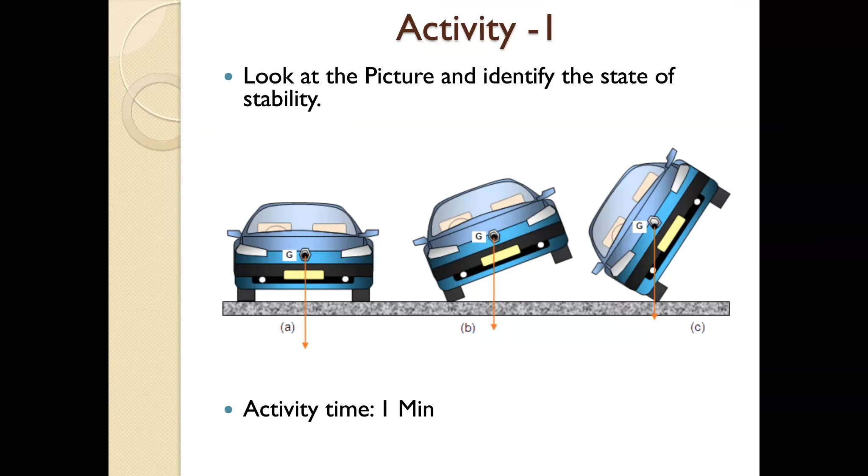Thank you, Yogeshwar. A is fully stable, B is partially stable, C is unstable. Okay Yogeshwar, can you unmute yourself and tell me how you have judged the system as stable, unstable, or partially stable? In the case of A, the center of gravity is at the middle and both sides are balanced, hence it is stable. As in case of B, partially, one half is stable, the other is making it imbalanced, so even a slight disturbance may push it to unstable. Very well said sir. The last one is completely unstable because the entire weight is managed with a small surface area, so it is completely unstable. Well said sir, very good sir. Thank you for your response.

So as you rightly mentioned, it mainly depends here. I think this is very basic, at the physics level, the school level, this will be used, right? So based on the gravity and based on the weight, how it is balanced, the system, we can justify whether the system is stable or unstable if there is an external force acting on it. So that's the key point over here.

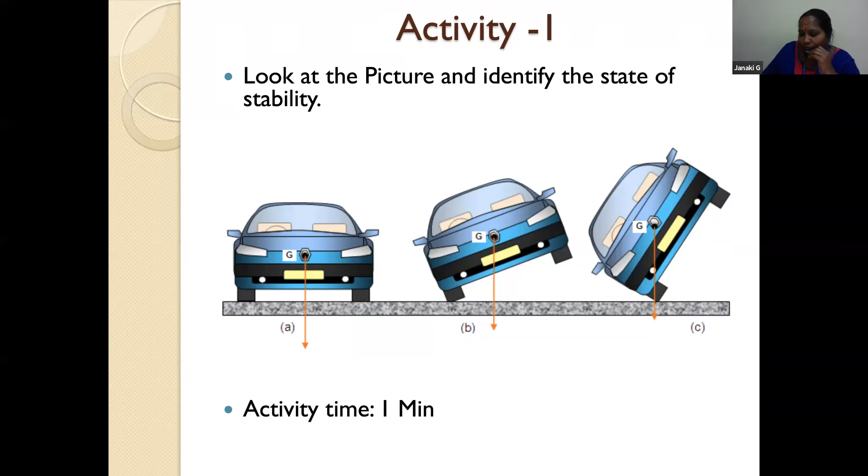Here we are going to discuss about drive systems, meaning you'll be having motor and loads, and it involves some inertia, the mass, and with speed variations or any small disturbances, how the system stability gets collapsed and what we need to do to make them stable. So that we need to analyze, right? Thank you, Yogeshwar, for your input.

Let's start with the definition of stability. A system is stable when the output is completely controlled - for the given input, you get the expected output. Then only we can call that system a stable system. The literal definition is: the ability of any system which provides bounded output when a bounded input is applied. That's what we call BIBO stability.

When we talk about the stability of a system, there are different categories. We can classify the system as steady state, transient state, or dynamic state. Generally, in an ideal case, we call that steady state stability. If there is an abrupt change or a large disturbance occurring, we do transient analysis. Dynamic analysis is whenever we run the system, we'll get some small disturbances, so even for small disturbances, the functionality of the system should not be affected. For that reason, we need to analyze dynamic analysis, and accordingly control our inputs so that the system will be stable.

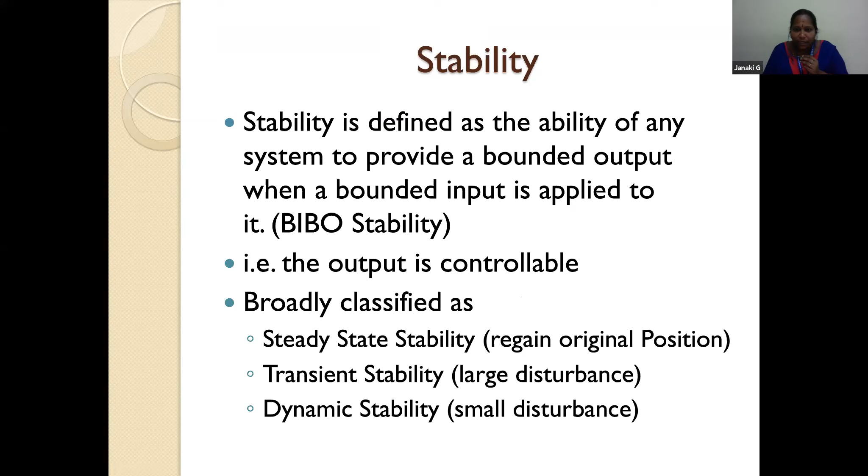Let's have a small activity. Draw the response curve for all three states identified from activity one - you mentioned a stable system, partially stable, and unstable. If you'd like to draw your time response curve, how will you draw it? Please draw it on a piece of paper, take a snapshot, and share it in the chat box. Is the question clear? For the three states - completely stable, partially stable, and unstable system - how will the time response be?

Just draw it on a piece of paper and take a snapshot and attach it if you're using a mobile phone.

Okay, I will tell you.

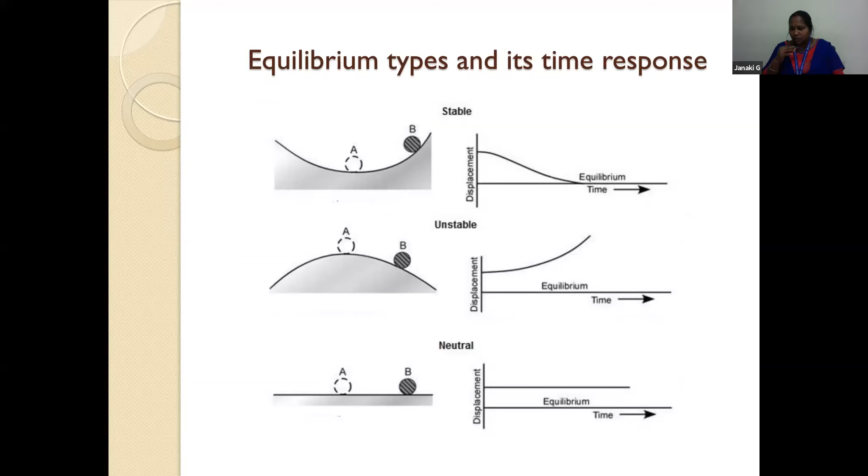If it is a linear system, then we can easily categorize and analyze it this way. But if it is a complicated system, and your characteristic equation is not a quadratic but a higher order equation, solving it by this methodology is somewhat tedious. So in that case, how will you analyze the stability of a system? We need to apply the knowledge of control system theory - either go for Routh stability criterion, or Bode plot or Nyquist plot. There are different techniques you can apply to analyze the stability of a system.

So before we proceed - if we apply the root stability criteria, you'll have to write your characteristic equation and find the roots, and see how all the roots lie on your S-plane. Based on that, you can judge whether your system is stable or unstable. Generally, the system is stable when all the roots lie on the left of the S-plane. If any roots lie on the right of the S-plane, then we call it an unstable system.

To some extent, sometimes the poles and zeros or the roots may lie on the imaginary line. In that case, you need to analyze the system and judge whether it is critically stable, marginally stable, or unstable. For that, you need some more steps, and you can add controllers like PI or PID to make your system stable.

If you see, the disturbances are damped out. If your system's damping ratios are high, then the disturbance created in your system will automatically die out and make the system more stable. Whereas if the roots lie on the right of the S-plane, the damping ratios are not very high, which means the disturbances keep on increasing. That definitely makes your system unstable.

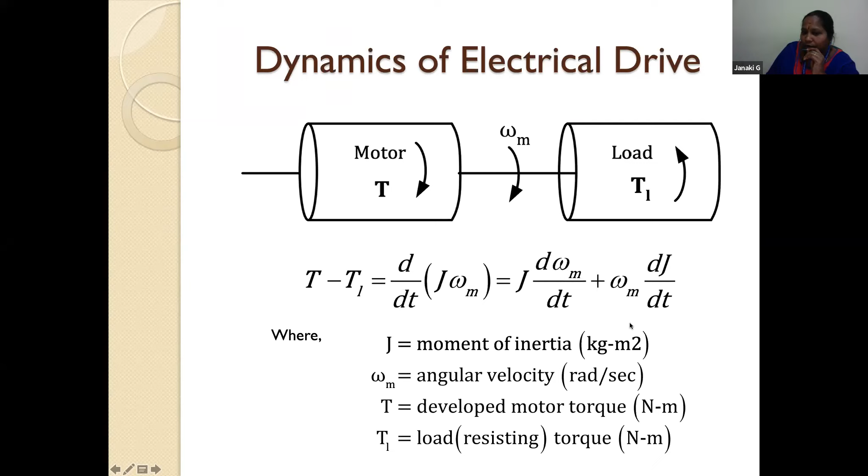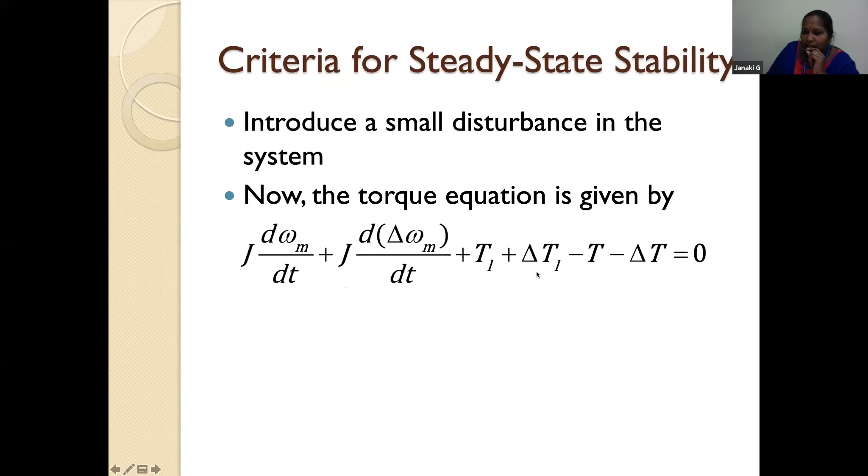So if you introduce a small disturbance in the system, the equation will become like this. Change in the load torque and change in the inertia motor torque, and also we need to consider change in the speed, how it is added. So if you add everything, it should be equal to 0. So whatever the changes come, it should balance, and this is the equilibrium state. That's why it is equated to 0, right?

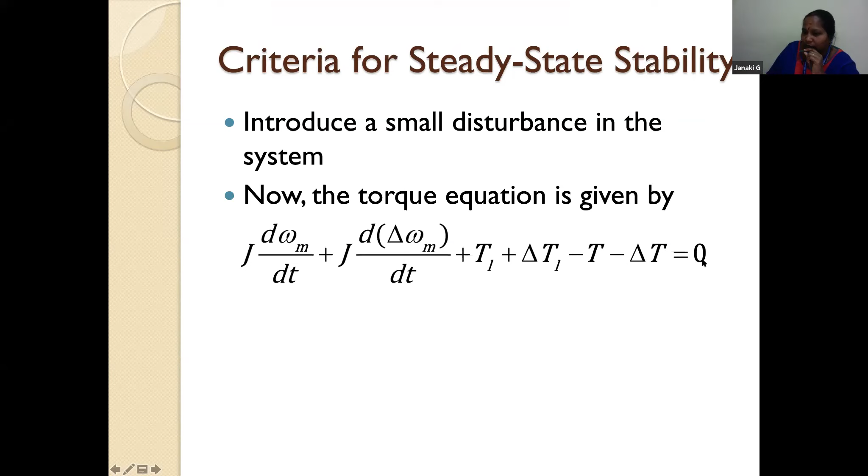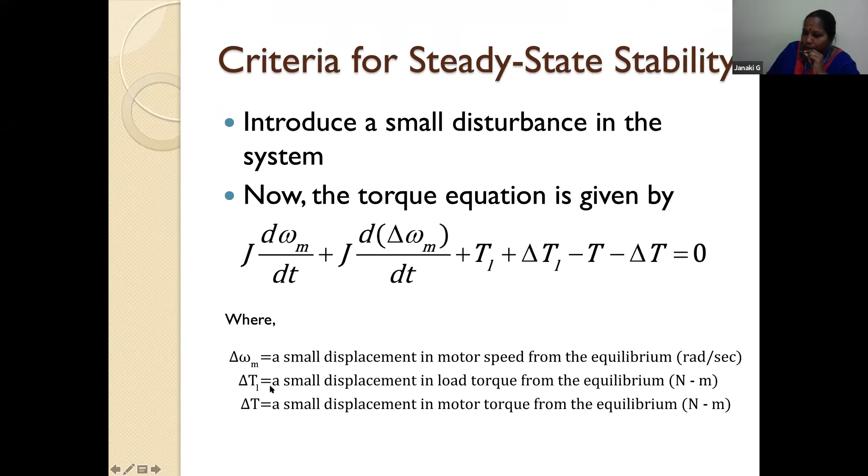Where delta omega m is the small displacement in the speed, and delta TL is the small displacement in the load torque, and delta T is the small displacement in the motor torque. So as we mentioned here, this will be equivalent to J d omega m by dt plus load torque minus motor torque is equal to 0. So you can equate it like this also.

This is the initial speed. Del omega m naught is nothing but initial speed. So I'll be getting an exponential waveform. So that's what we have shown in the time response curve, right?

If the damping ratio is high, automatically the disturbance will be died out. If the damping ratio is less, what will happen? It will oscillate more. So automatically it will lead to instability. Okay, so that's what.

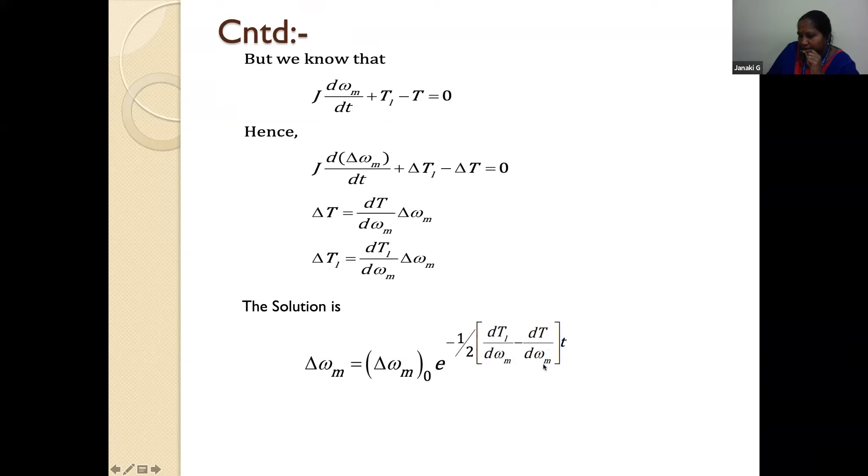So we need to maintain this one. We need to consider the exponent part of your equation. The speed equation will be telling you how your system behavior is. So that's more important.

So if you see the condition here, the exponent part, if it is greater than 0, which means that your oscillations will be, or the damping ratio is very less, so it will tend to oscillate more. So that will lead to the system becoming unstable.

Whereas here, if the exponential term is less than 0, which means the damping ratio is high, so your oscillations are died out, and the system will be stable, or it will come back to its original position or original value, right?

So that's the idea. And if it is equal to 0, it's intermittent, which means we need more analysis, like the partially stable conditions. We need to check in which load conditions, or if the load current increases slightly high, it may tend to go to unstable.

So mostly in this criteria, either the pole or zero will be lying on the imaginary part of your S-plane. If you take 2 or 3 case studies and analyze, you'll get to know that when the roots are on this imaginary axis, you will mostly be getting this intermittent, or marginally stable, or critically stable conditions. We can derive this, right? So this is the main condition for checking whether your system is stable or not.

So the rate of change of load torque with speed should be greater than that of your motor torque. Okay, so that is the condition for your stability state.

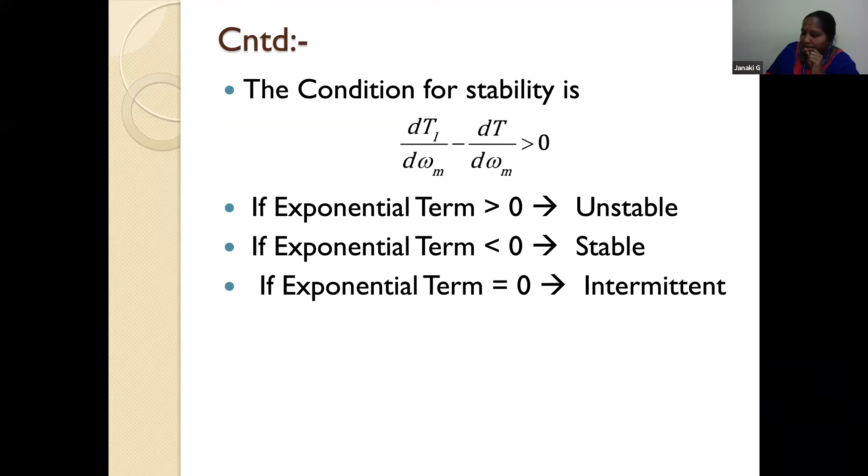If the load torque change is greater compared to your motor torque, then we can state that the system is stable. So the motor should not get more changes. Even if on the load side any changes come, the motor controls and brings the system back to a stable position. So that's the key point here.

Before we go for analyzing the stability states, we need to know about the different loads, right? Because the topic itself is to identify different load conditions. So we need to know about the different types of loads. We can classify the loads in different ways.

So here I've given a category based on the nature of load, meaning whether it's a resistive load, inductive load, or capacitive load. The system characteristic equation will completely alter, and based on that you need to do an analysis. So it could be a resistive load, inductive load, or capacitive load, and I have given some examples.

If the diagram is visible, if the picture is visible, anybody?

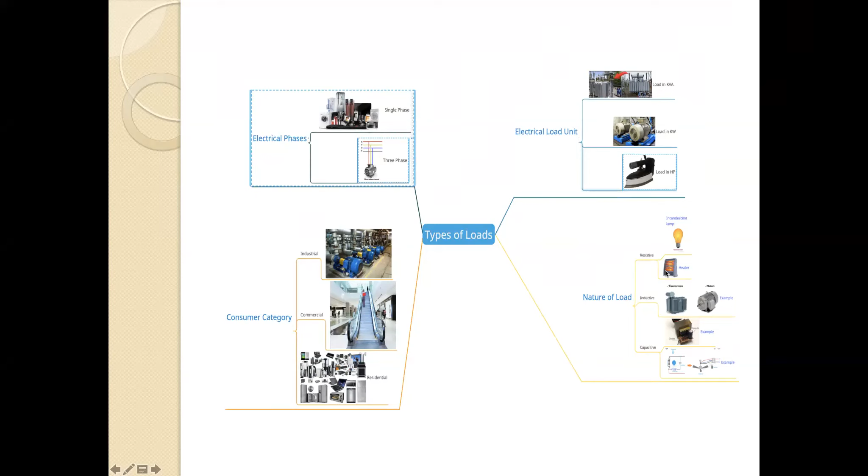Okay, so examples of resistive loads we use in our household, right? Your heater, or otherwise incandescent lamp, even your toaster, your iron box are all examples of resistive load. And for an inductive load, there will be some transformers and your motors, all examples of inductive load.

And for a capacitive load, you'll be having your charger, or even in your fan, you'll be having your condenser, right? So all that will be a capacitive load. So generally we'll call that reactive loads, right? And you can call it that way also, like resistive loads and reactive loads. Again, reactive load we can categorize under inductive and capacitive.

And again, based on the load units, okay, we'll call that load whether it's in kVA. Mostly the transformers and all you will rate in kVA, right? And for motors and all, you'll rate it in kilowatt, or you'll be mentioning it in horsepower also to some extent. And for iron box and all, here in load HP, I've given the industrial ironing and all, you can use your high values.

So here that is swap. Motors generally, horsepower you will take, and for ironing and all, you'll use it in kilowatt range also. And based on the phases, whether it's single phase - most of your household appliances are single phase loads.

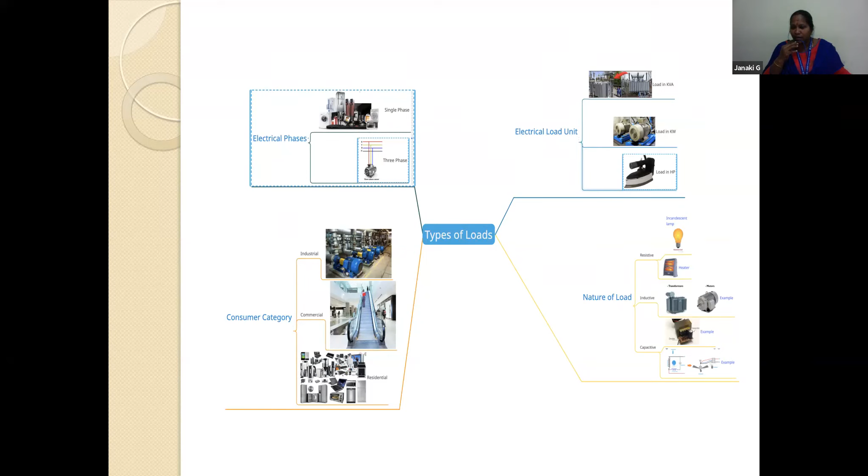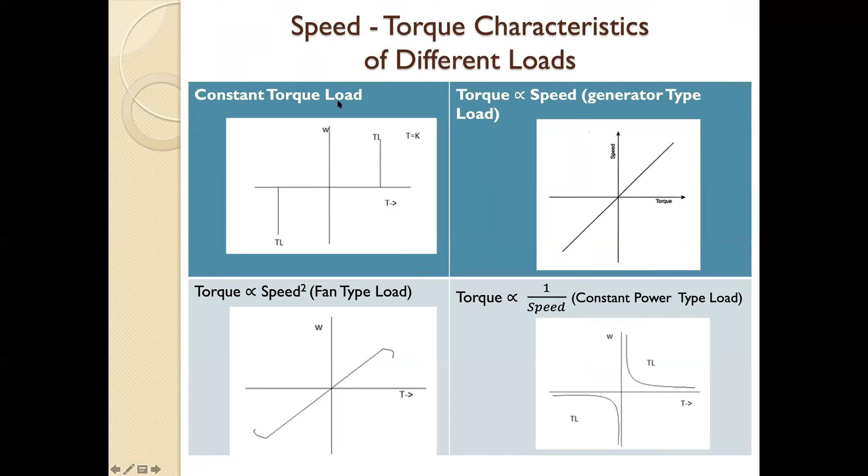So here, since it's a drive, we are talking about the speed torque characteristics. We can classify it into 4 types: one is constant torque, another is torque directly proportional to speed, another is torque directly proportional to square of the speed, and torque inversely proportional to speed. Generally, for constant torque, even if the speed varies, the torque will not change - torque is constant.

So for that type of load, you have to identify your operating point, how you choose your motor - that you need to find out. Similarly for torque directly proportional, this is a slope, so when you want to operate it, based on the operating point you will choose. This example is for generator type load, this is for fan type, and this is for constant power type.

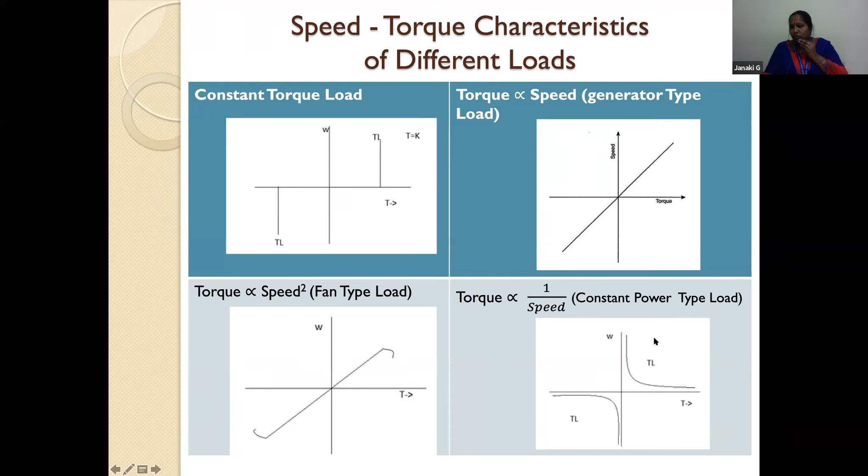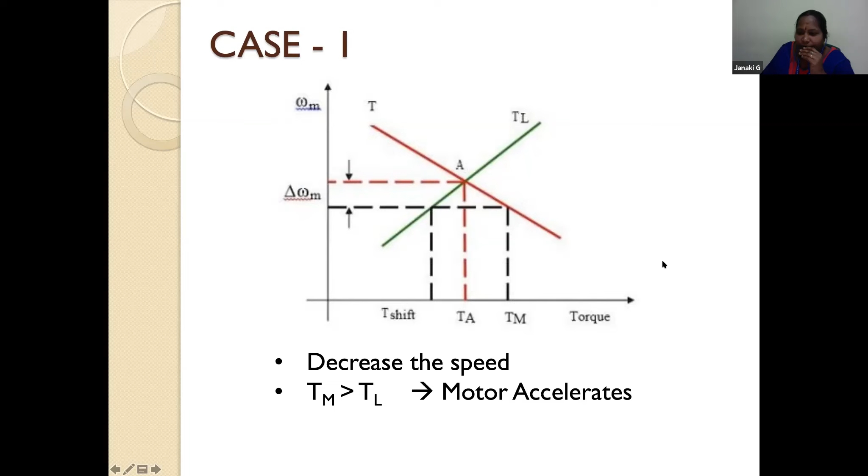Can anyone respond? Okay, thank you. Thank you, Dhamirajan sir.

Let's consider the second case. Assume that instead of under voltage, suppose over voltage is occurring in the system, and there is a sudden drop in the loads. For example, at night, if everyone switches off their lights, the load tends to decrease.

This is how you need to analyze a simple system if you know the speed torque characteristics. That's why whenever we design any circuit, we need to do experimental studies, note down readings, and plot the speed torque characteristics. Based on the speed torque characteristics and the required torque characteristics prescribed by the manufacturer, you match both under load conditions and normal ideal characteristics, and analyze whether your system is stable or not.

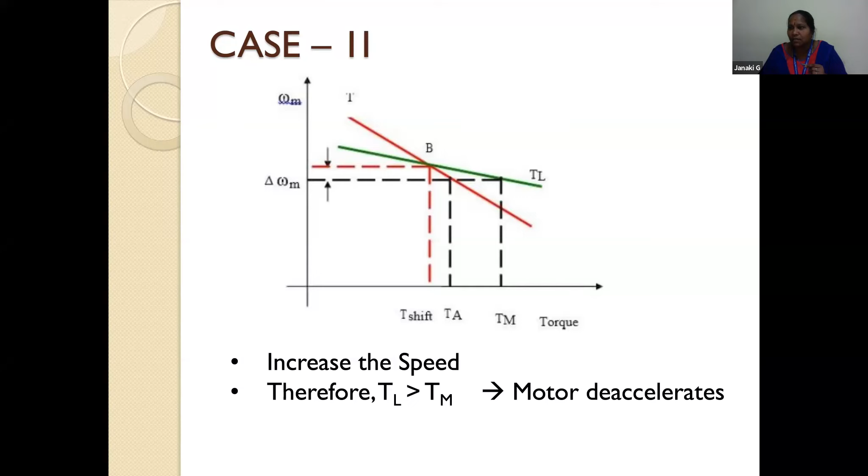Now a small activity: I'll give you different scenarios for different load conditions. Please identify the curves and tell me which characteristics represent a stable system, which represent an unstable system, and which represent a not or partially stable system.

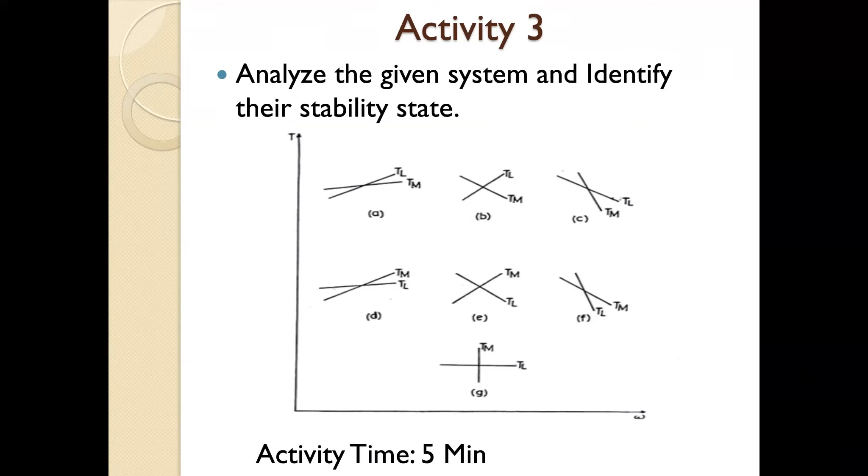Okay. So shall I give the answers or you know your answers, how I have to take this?

Okay, at least Tamil sir, are you able to hear me? Tamil sir.

Okay, G is stable, G is stable or G is unstable. Of course, Yogesh, many of you all know it's the same question in Vidyarthi Plus. That's not a problem, but how are you analyzing if the curve is different or in this G state, why you're not able to say whether it's stable or unstable.

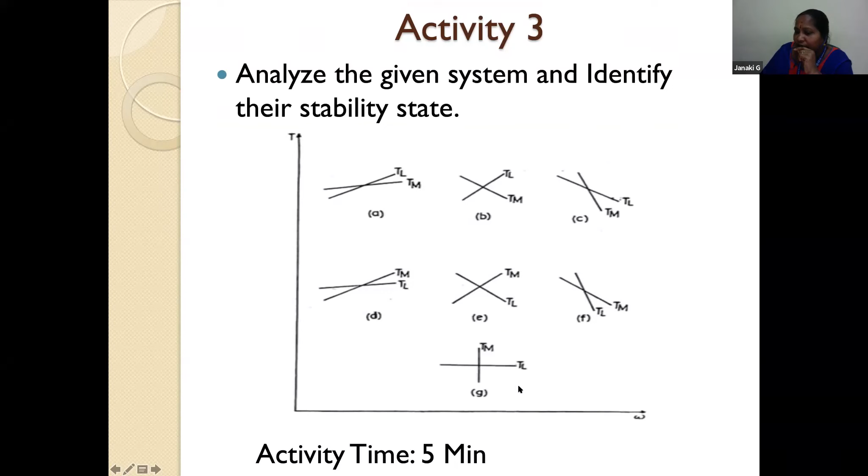So for doing analysis for such kind of system, we adopt different methods, like Routh-Hurwitz method, Bode plot method, or Nyquist plot criteria. So in Routh-Hurwitz, you need to write your characteristic equations and plot your roots in the S-plane, draw the curve, and find out whether the roots lie on the S-plane and whether it is a stable system or not, whether there is a sign change. If there is a sign change in your first column, then we can say the system is not stable, right? So in that way, you can identify whether the system is stable or not.

For the Bode plot, you need to draw both and find out your gain margin and phase margin. Even if your gain margin is more compared to the given value, then you can state that your system is a stable system. The phase margin works the same way, it has to be greater. If the value is lesser compared to the reference value, then we can say that the system is not a stable system.

For the operating point, you will be given some value of phase margin and gain margin. That is for the design parameters, right? So if there is any alteration occurring in your system, you'll be deriving your characteristic equation and doing the analysis. If that phase margin is greater than your set value, then we can state that the system is stable.

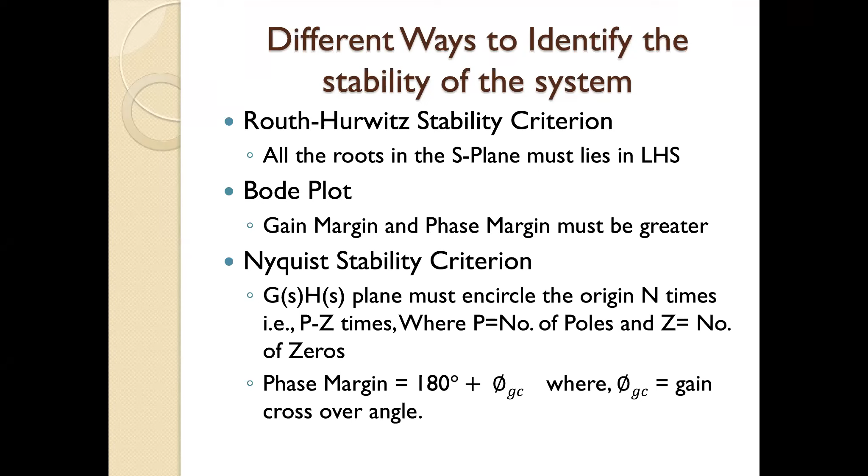If not, I would like to give you some references. Okay, so here you can see MIT.

We'll wait for a minute, ma'am. If there are no questions, we'll... Yeah, I'm not winding up. If there are any queries, I can answer. Otherwise, I will share some other thing once again. Okay.

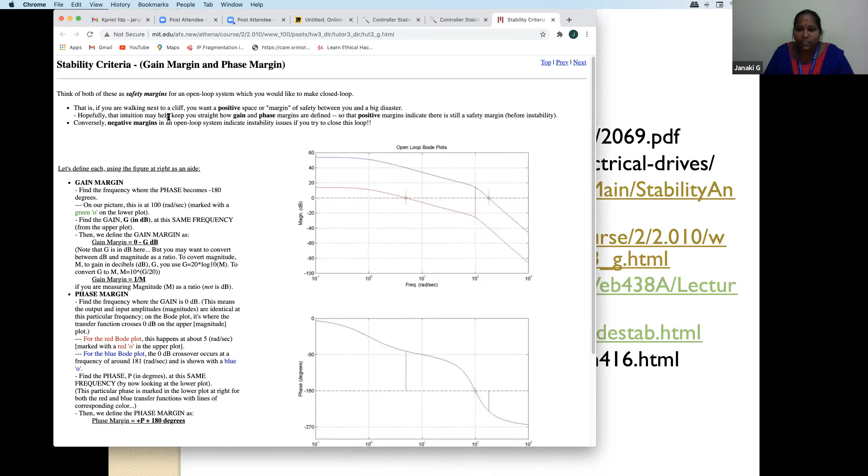So for stability criteria analysis using the phase margin and all, you can see here there are so many animations with questions. Is the screen visible, sir? Yes, ma'am, visible.

Okay, fine. So most of the time, what happens is the teacher fails to give a correct assessment methodology whenever we ask in the final examination. Most of the questions may not be discussed in the class, so that is the reason why there are a lot of failures in your final examination. So because all the students have enormous potential, if we scrutinize and strategically handle them, definitely they'll perform well. So we can give them practice in the class session itself, so that won't be a burden for them during your examination.

So whenever you ask your questions in your final examination, that should match with your learning outcomes, your expected outcomes, you need to keep that in mind. So you can practice. There are so many websites available through which you can give them a picturized idea how they have solved that problem. Instead of going in for just Vidyarthi Plus or something like that, you can use this kind of websites, and it will be definitely helpful for them to see how the analysis is made, with clear explanations and examples given with the questions.

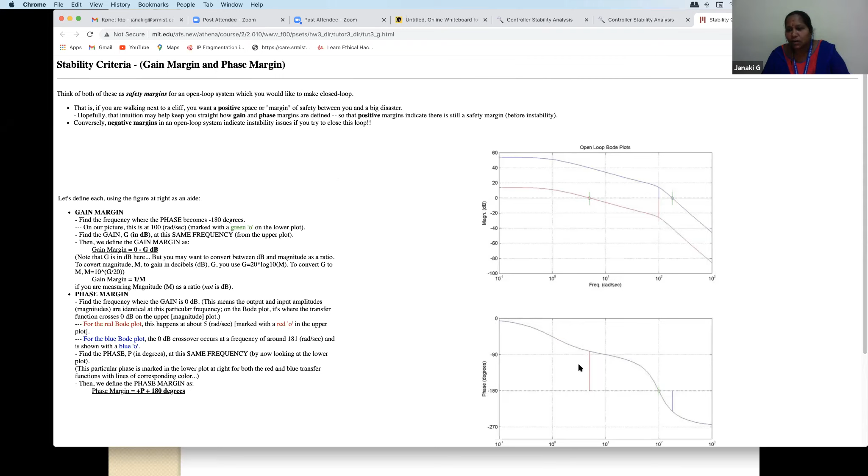Okay, so here's the stability criteria analysis. Think about the gain and phase safety margins of an open loop system which you would like to make closed loop. This is the characteristics of an open loop Bode plot. So if you want to make it a closed loop system and see the stability, you need to change your system into a closed loop system. This is an example, right? Similarly, you can have Nyquist plots also. There are some examples available.

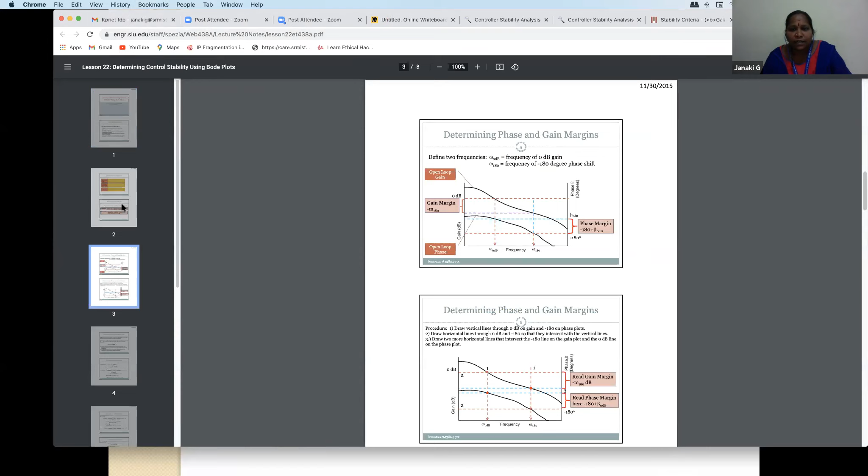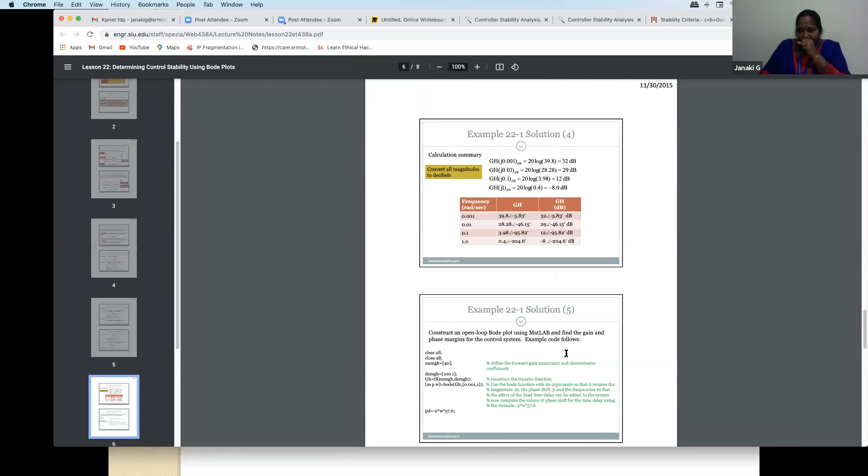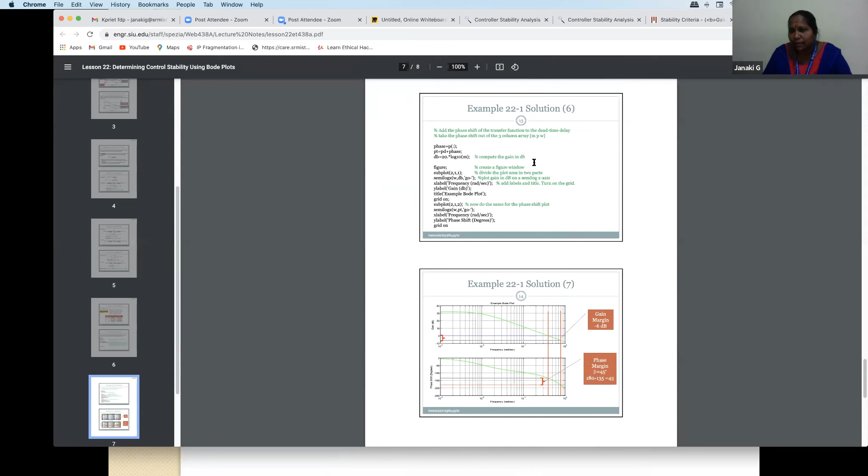One second. Okay, here's the clear explanation given for how to determine some examples. The solutions and all are there. So try to ask your students to use Scilab, the open education resources. You can see here the codes are all available, and you can directly test it in MATLAB. So that is available here. Maybe I can show you in the MIT website.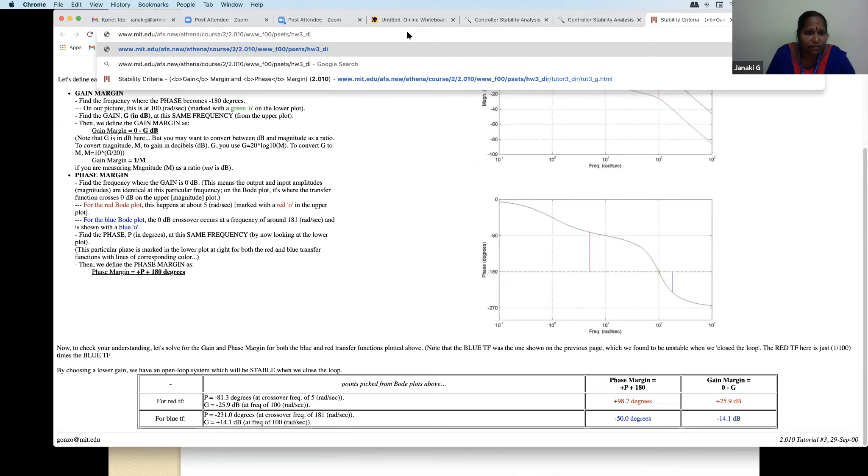So you can see here tutorial notes. Okay, so here you have placing poles and zeros, and the full MATLAB codes will be available. So as a beginner, you can see here the codes available, right? For the BTech students, they may not be aware of MATLAB, maybe that is a part of your control system lab or electric drives lab. So you can use this kind of websites for enhancing the knowledge of your students. Here, given examples with the coding, MATLAB coding, it's given in this website.

Please refer your students to this so that it will be useful for them initially to incorporate that research attitude in your students. You can also pose some tutorials to your students as an open-ended question. That will be helpful for them to first analyze how the normal system behaves, then they can design different innovative designs. Only if they are very familiar with the concepts, or very strong in their concepts, can they design new things, right? So for that you can practice, you can note down these websites which will be helpful for them to do the stability analysis.

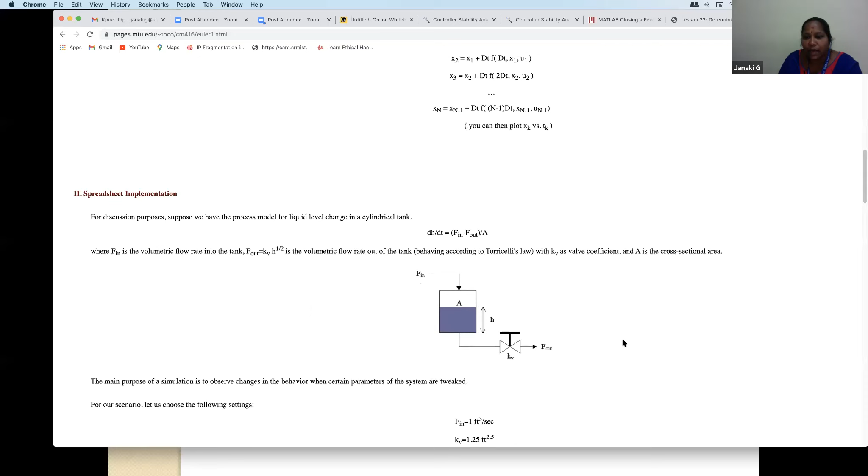So here you can see what I've got on screen. You can see how you have to design your PI controller, PID controller. That may be somewhat tricky for teachers to explain in class, especially through online mode. If you want to explain, you can use this kind of resources like simulations, spreadsheets, short tutorials. So you can just refer your students to this so they learn how to convert into mathematical modeling, how they need to analyze it. So everything they can utilize for their teaching.

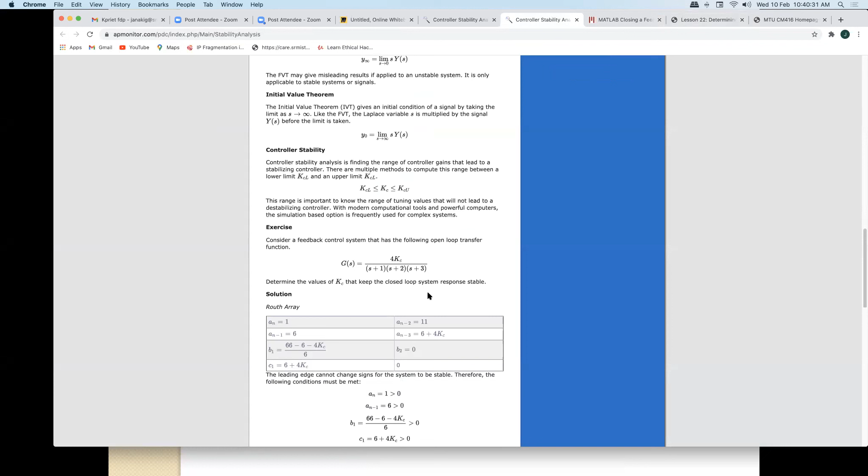Ma'am, are you able to see this screen? I hope this is the root locus, right? Here there is an animation, you can change your value and see how your plots vary. And here your Routh array is formed based on your characteristics equation.

This is the exercise problem for you, and you need to find out whether all the values are positive. That basically depends on your Kc value. So if you check all your lines are positive, then we can say the system is stable, otherwise we can say the system is not stable. That's how you need to do it.

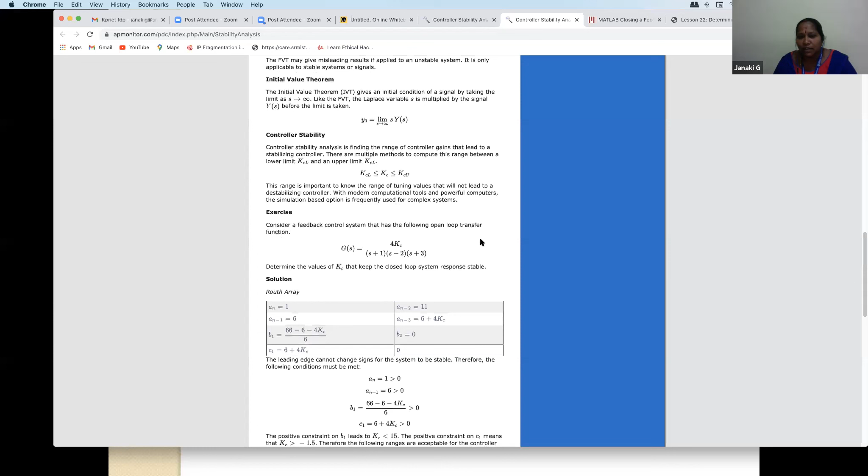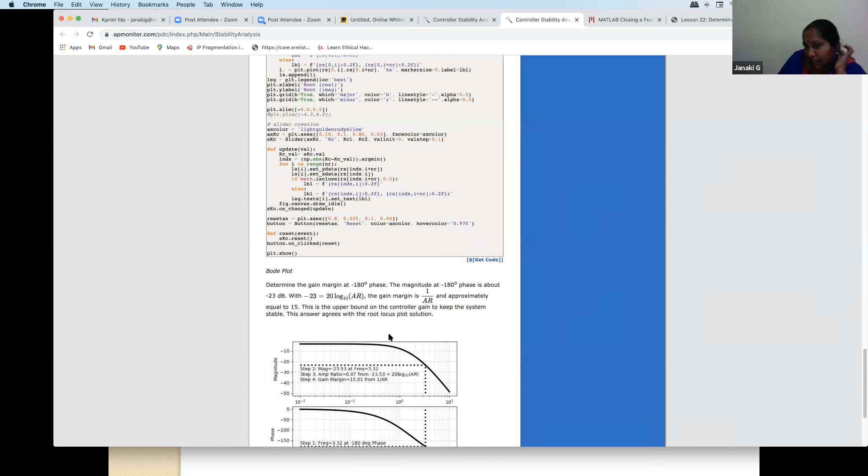So this is your curve, so if you change your K value... here you can see the code. Just copy the code and run it in Python, and you can see how the variation is.

Please make the test easy. Is the test difficult, sir? No, no ma'am, they're asking about the final test, for the Atal FDP. They have to write a test in order to get the certificate, so they are talking about that test.

Sir, it's good to know that you are having a final MCQ or test to verify what input they have taken, the takeaway from the FDP. That's a good thing. Yes ma'am, we have a session on that, Atal has planned it that way. The main idea of going in for such FDPs is how they are enhancing their skills in teaching and learning, that is the main idea.

I request all participants to kindly interact, otherwise it will be more like one-way communication. Without you interacting, I don't know whether the information is already known to you or not at all clear, so that ambiguity is always there in the speaker's mind. When you start interacting, you can also get some inputs and I can give more inputs too, otherwise I'll stick to my things. That's the reason I always ask for interaction in the session.